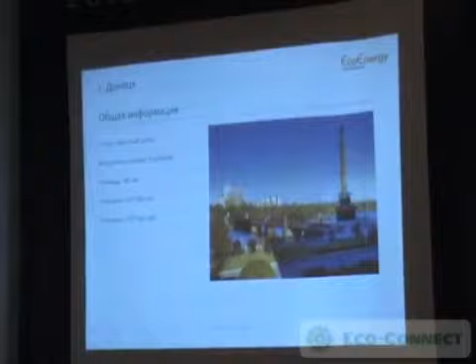Some further data on Donetsk. I'm not going to dwell on this information because I think it's fairly well known, but just concluding that the city itself has approximately 1 million people, which is an important data point in the sense of how much municipal solid waste is available at the moment in Donetsk.

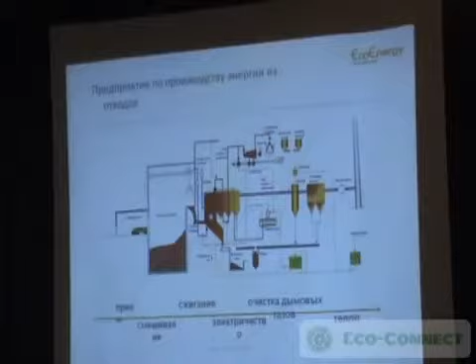Here's some further data on the incineration process that we're not going to go into. I would rather like to just show a short picture. There's a quick slide on the facility, where on the left side we can see the waste trucks that are dumping the municipal solid waste into the so-called bunker, where it is being stored and later on brought by a crane into the boiler, where it is burnt, and then heat is recovered in order to generate electricity through the steam turbine that we can see on the very top of the sketch.

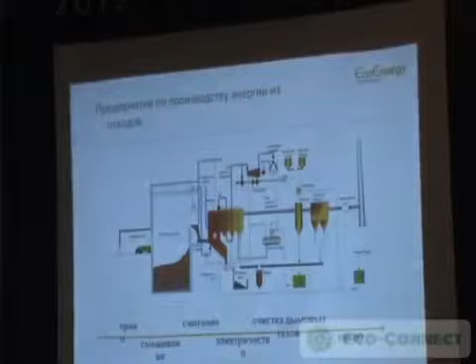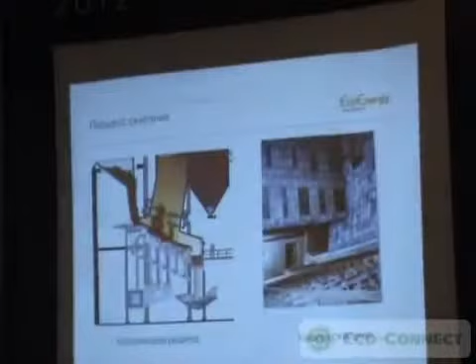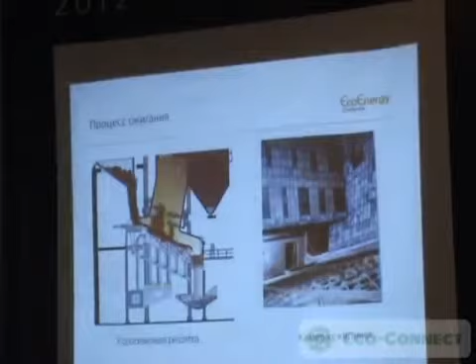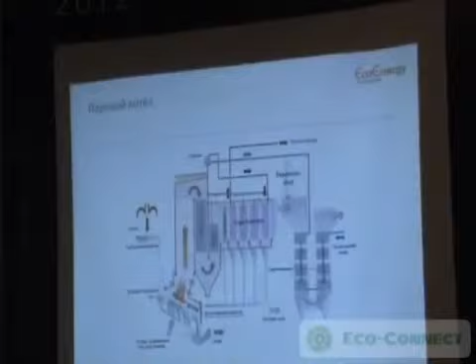Towards the right side, we also see a number of emission control systems in order to not only reach the levels of the Ukrainian legislation in terms of air emissions, but also meet the requirements of the European directives for air emissions, which are much more stringent. Here are some further slides on just the burning process, and on the right side you can see a picture from inside the boiler where the waste itself is being burned. Here is another picture of the heaters, superheaters, which are generating the steam that is used in the process.

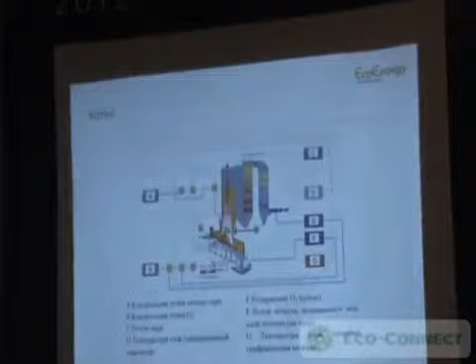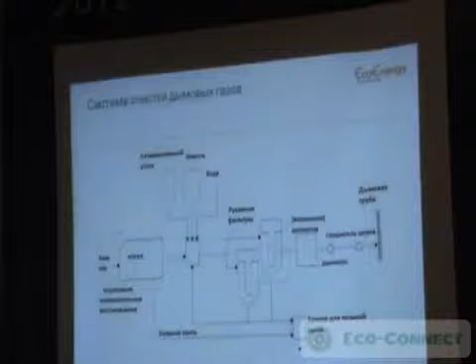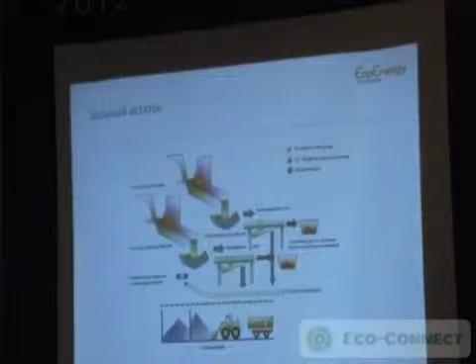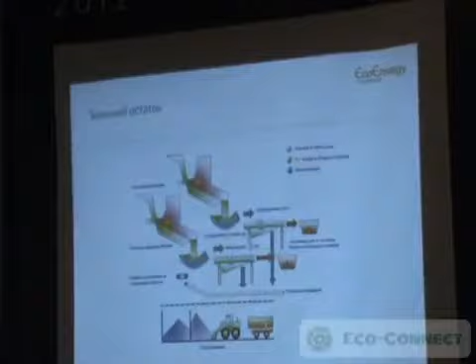Here we can see some further process schemes on how the so-called bottom ash that is coming out, which is an inert type of material, which in many European countries presently would be used as landfills or road fill material.

In addition, we will upgrade some of the boiler houses. We will also provide a number of workplaces. But I think above all, which is a very important issue here today, we will be able to reduce the amount of natural gas that is being utilized in the district heating network, and thereby provide support for the energy security in Ukraine, reducing the natural gas bill.